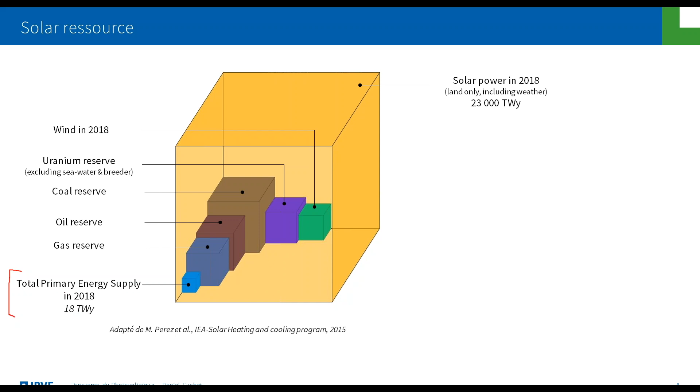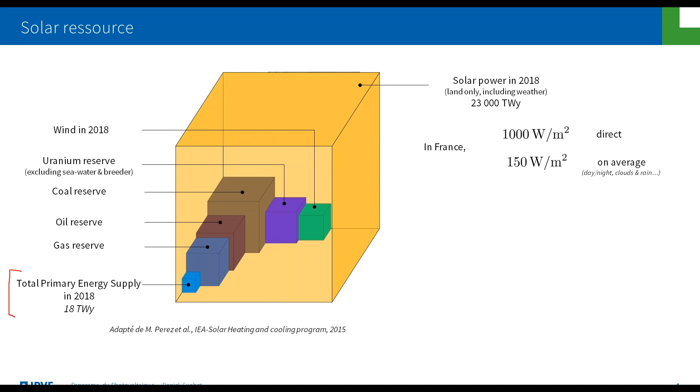If I try to put figures on this, I guess the orders of magnitude to keep in mind is that the solar flux in France is about 1,000 watts per square meter if you are mid-summer on a not too cloudy day as today. So the max power is about 1 kilowatt per square meter. And if you take into account weather, if you take into account days and nights, you have an average yearly power of about 150 watts per square meter.

If you try to understand what these figures mean, it means that if you want to produce the electrical power of France on average over the year, the surface you need is actually 10 to 20% of the surface currently covered with roads. I want to emphasize here that it doesn't mean we should make solar roads. I'm not advocating solar roads here. I'm just talking orders of magnitude in terms of surfaces. And I'm considering how much surface we need to have the yearly production without considering power stability or anything, just energy balance, because I still think it's a relevant order of magnitude to have in mind.

To me, what it really means is that solar raises issues in terms of it's a diffuse source, it's an intermittent source, absolutely, but it represents an energetic manna. It is, strictly speaking, energy falling from the sky. And in the context where we try and think of our energy supplies, I don't see how we could not consider it as a potential energy resource and try to figure out how to handle its drawbacks.

So you have, let's say on average, 150 watts coming from the sky. What can you do with this power? Well, essentially you can do 3 things. You can convert it into chemical bonds, and this will give you biomass, for instance, with a photosynthesis process, which has about 1% of power conversion efficiency. You can perform a transformation from solar energy into heat. This is called solar thermal, and it has an efficiency of about 80%. Or you can try and convert this power directly into electricity, and this is what solar photovoltaics aims at. And in the next coming slides, I will be discussing how efficiently we can perform this transformation.

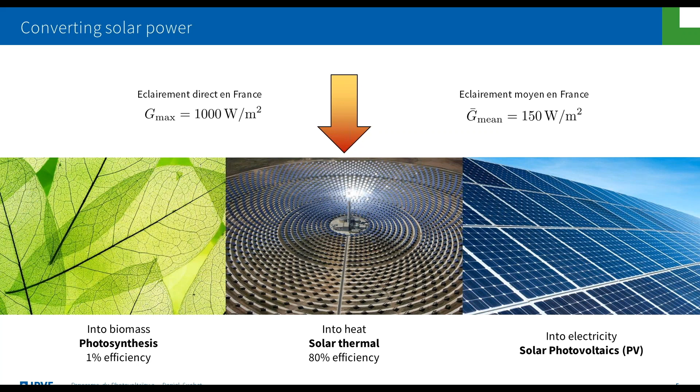Now, of course, the electrons, if you just leave them alone, won't stay in the conduction band forever. At some point, they will relax towards the valence band. So you need the material to absorb light, but you also need the material to make sure that these electrons have a long lifetime.

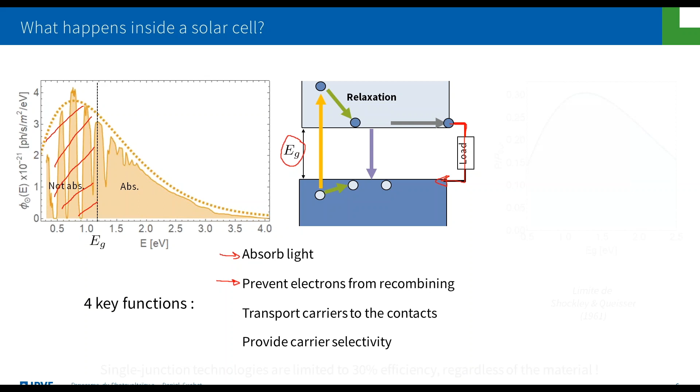So you understand here that essentially, if you have a low gap, it won't work. If you have a high gap, it won't work. You need to aim for something in the middle where the value of the gap is well adapted for the solar spectrum. And this is what I show you here on the right-hand picture. I think you see it now.

This is the maximum power conversion efficiency which you can get as a function of the gap. And you see that the max power conversion efficiency you can get is about 30%. This is called the Shockley-Queisser limit. And it works for a gap which is about 1.1 electron volts.

This, as you see, comes from the fact that we use one single gap for this conversion scheme. And so it doesn't really depend on the material you're using. The material will tell you if the gap is good or not. But this 30% efficiency is the best efficiency you can get for a single junction scheme.

This is also why we're using silicon for solar cells, because silicon has a gap which is close here to the optimal gap for power conversion of solar power. So I think this image here is interesting because it tells you that this 30% max efficiency is a basic limitation for single junction solar cells, and it also tells you which kind of materials we will be looking at when we want to make a solar cell.

We need a material with a gap around the electron volt of band gap, and we need this material to satisfy these key functions, which I have discussed when talking about the conversion scheme. So to me, this very simple picture gives you a hand-waving understanding of the material constraints when you want to do solar power conversion.

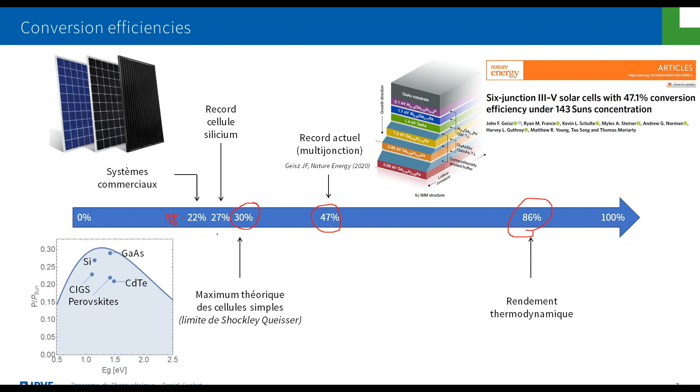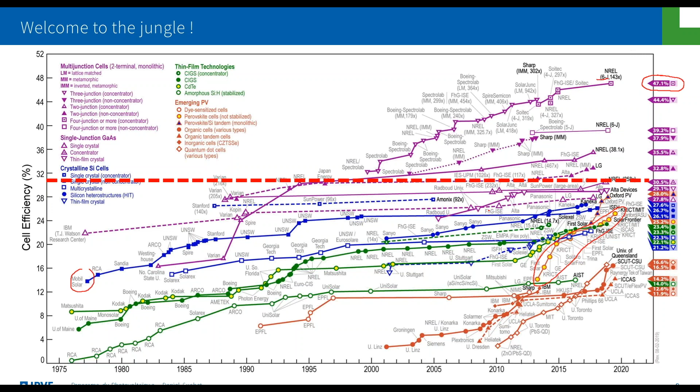So when you talk about solar technologies, what can be a little bit puzzling is you can be talking about any of these lines, and you see that there is a huge jungle of lines. So for this presentation, I will actually focus on one of these lines, which is silicon solar cells. And the reason why I will be talking essentially or exclusively about silicon solar cells is that silicon today represents a little bit more than 97% of the actual market. The remaining few percent are all the other cells which you have seen. So when you talk about solar cells, if you don't make a more accurate statement, you're really talking about silicon solar cells. So in the rest of this presentation, I will be giving you notions about silicon, because I think as of today, it is the most representative data which you can have when you talk about solar energy.

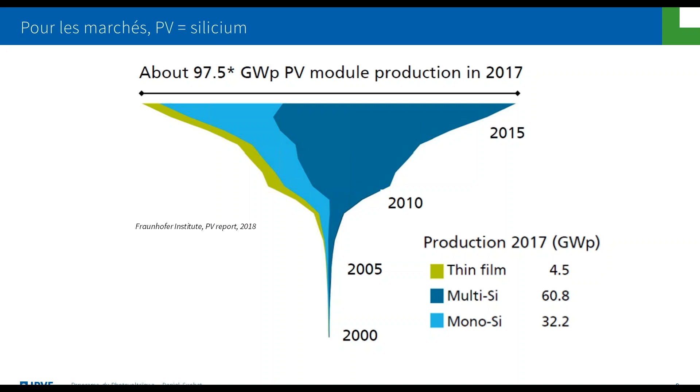When we talk about silicon, we actually talk about a range of scales, which goes from, let's say, raw silicon, silicon chunks, which look like this, all the way to silicon modules, that is to say what we call panneaux solaires, solar panels. And in the next coming slides, I will be telling you a little bit more about these different ingredients of solar cells, how to get from one to the other, what the processes look like, and what are the orders of magnitude about all this. So I'm getting here somehow to my second part, where I will start giving you orders of magnitude and notions on the state of the art of current solar cell technologies.

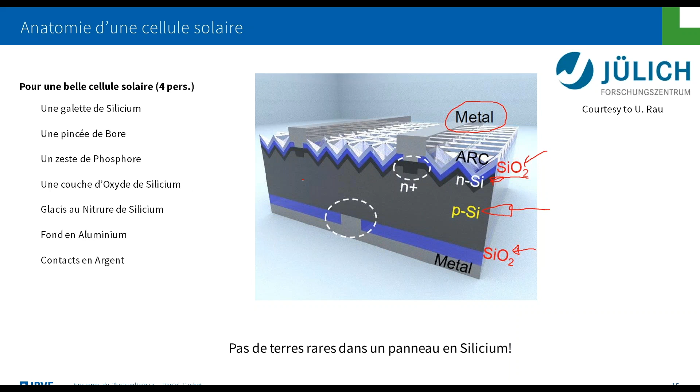Finally, once you have cells, what you are going to do is you're going to take these cells together. You're going to put 60 or 72 of them connected in series and parallel, and you're going to encapsulate these in glass. You're going to frame it and sell it as a solar module, which you can actually sell to customers.

So now I'm really going towards the second part of this talk, and I will give you market notions of PV modules. And what I really like to do in this discussion is two things, is to show you how these things evolve and how they evolve fast. And this is to give you the notion that if you want to think about solar, you really need to update your figures on a regular basis.

And I will try also to give you a reading grid and to draw your attention to some, how to say, subtleties in the different definitions, which I think are required to understand what the figures really mean. Because there are many different figures, they don't all address the same things, and I think it is key to understand the meaning of these figures of merit.

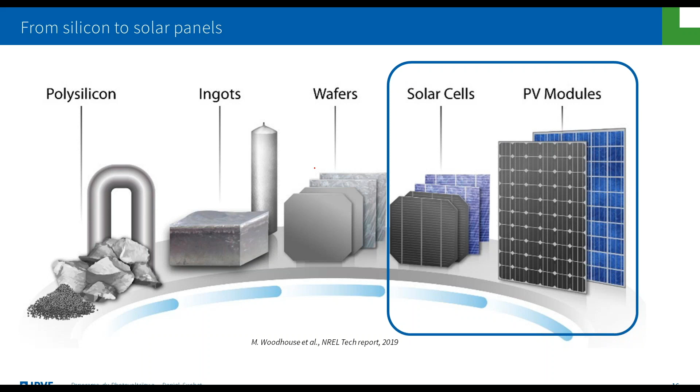I look at how many watts this module is able to produce from this illumination. I calculate how much producing the module costs, and I make the ratio between these two quantities. So it doesn't tell me anything about integration, of course. It doesn't tell me anything about lifetime of the module. It doesn't tell me if the module often works at its nominal power or not.

But the interest of this figure of merit is that as it's just out of the line, it allows me to compare different modules in the same conditions. And so if I want to have a notion of how the industry itself is performing, then this here is the good indicator, because it tells me what happens just outside of the gate of the industry.

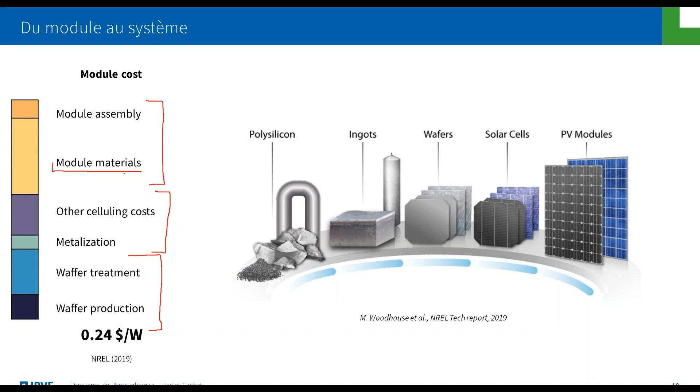So we need to compare this cost to what is called the installed cost. Installed cost is what it's going to cost you to put this solar panel somewhere, either on your rooftop or in a solar farm. So in addition to the module cost, you see that the module here now is just a fraction of this cost. It's about, depending on how you install the module, 10 to 30% of the cost.

On top of this, you need to account for electronics, for hardware, that is to say mounting racks and everything. You need to pay the installation, you need to pay taxes, you need to pay capital, you need to pay land acquisition or renting, and so on. So at the end of the day, the cost of the module is about 10 to 30% of the cost of the solar panel installed somewhere.

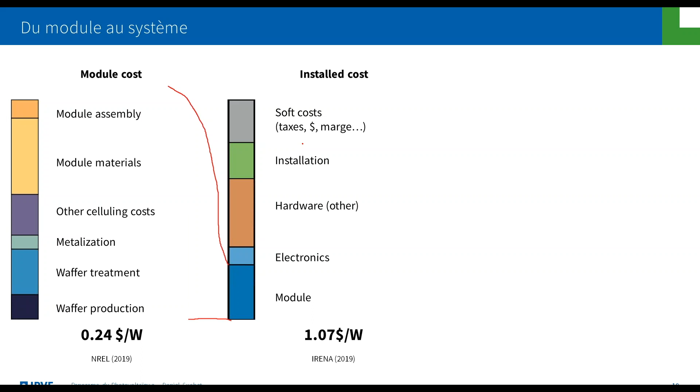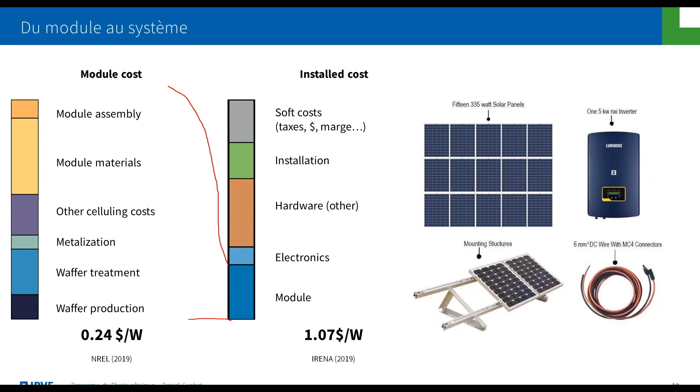So yeah, this is the additional hardware which you need to take into account. So racks, inverters, wiring, and the manpower to install all this. Then the next step, of course, is to consider not a cost per watt, but a cost per energy. And this would be the levelized cost of electricity, the LCOE, which accounts not only for the installed cost, but also how well the device is going to perform.

It's not performing always at its nominal power, in particular at night when it's not performing at all. You need to pay maintenance. You need to account for degradation. And so here is another order of magnitude, which I think is good to have in mind. Today, a silicon solar panel has a typical efficiency decrease of about 0.5 to 1% of its nominal power per year. What it tells you is that in 30 years, if you buy a 20% panel, it will go from 20% to about 17 or 16% of power conversion efficiency.

So even after 30 years, it's still performing actually better than panels you could buy 10 years ago. So the typical lifetime of panels is about 25 to 30 years at least. And I want also to emphasize that this levelized cost of electricity, that is to say really the cost of producing electricity, is about 1/3 of the actual electricity bills which you pay at the end of the day, which have to include also grid integration and taxes.

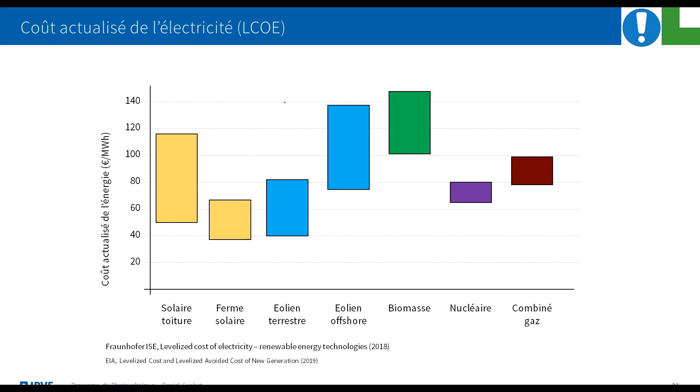Today, it is estimated that a solar module used in Europe will produce as much power as it required in the first place to extract, melt, and process cells. It will pay back this energy in about 1 year of usage. So the module will be used for 25 to 30 years, and within a year, it will pay back the energy it cost to produce the module. And I really want to emphasize here, I'm only talking about the module.

I'm not including here what it costs to add power electronics on top of this, what it costs to add storage if you need storage, what it costs to perform grid integration, because all these things will come on top of this year which I'm mentioning, but it will really depend on how you actually perform things. So I don't claim that this 1 year timescale is the definitive answer to all the questions that we are asking. I say it's the most basic unit on which we can all agree, and then we can discuss what additional things need to be added on top of this.

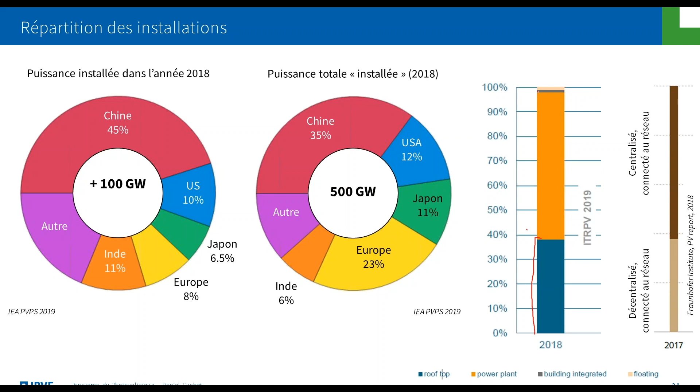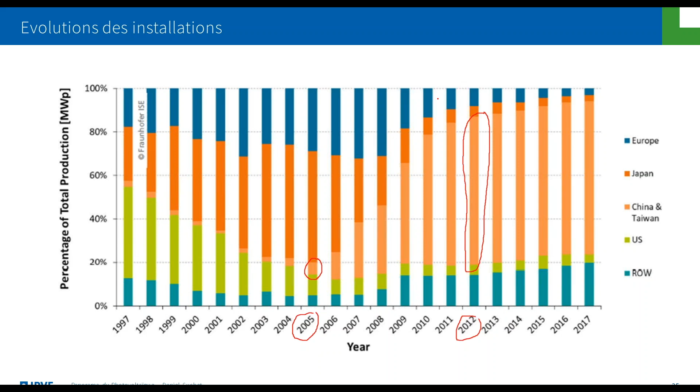One of the key drivers was that they could produce solar modules at a much cheaper cost than anywhere else. But I have also discussed here how the cost of modules at the end of the day will be just a small fraction of the cost of electricity.

To conclude this presentation in the last 5 minutes which I have, I would like to just flash 4 of the challenges which I think need to be tackled now. I think these challenges are not limiting yet, but if they're not addressed, they will become bottlenecks for future development of solar power. I had it in the slides, but I didn't have time to comment it.

Today solar power is about 3% of the world electricity. So today it is significant, but it's clearly not the main actor of electricity in the world. If we think that these 3% will increase, then we need to prepare now for issues which will arise when we reach 5, 10, 15% of electricity production, if we manage to reach these levels.

The first challenges I want to raise are related to the industry itself. Today, we're able to produce about 100 gigawatts of additional capacity per year. How can we scale this up? And how can we scale this up in a meaningful way, from economical, ecological, and social perspectives? I just bring here the question of this scaling up. It can come from different processes.

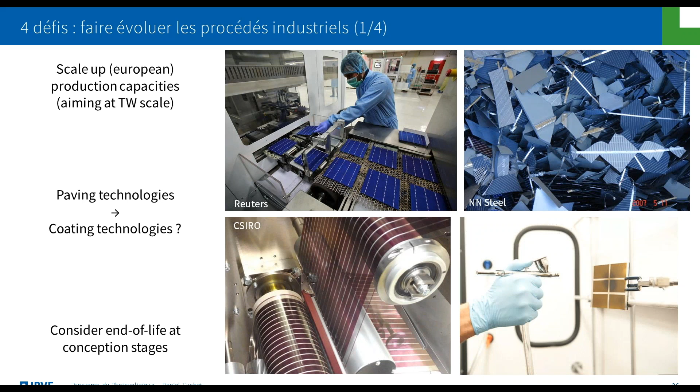We can recycle easily the outer layer, the window, which is being used to encapsulate. We can recycle easily the frame, and window and frame is the largest amount of mass in a solar panel. But today, the options for recycling the solar cell, which is the technology part, into a new solar cell are quite limited. Can we think of ways of conceiving, of designing these cells to help recycling 25 years after the cell is actually being produced?

The second challenge which I want to raise is a little bit less energy related, but it is market related. And it's to think of developing innovative applications for solar panels. I really, really don't claim that these applications will change the face of the energy sector in general, but they have two interesting options to my mind.

The first one is it can help the field moving forward in terms of innovation and of driving forces, and it can help solar energy getting closer to citizens and customers. And we know that having people involved with energy issues raises the awareness towards energy in general, and we need this awareness to be risen.

The third challenge which I will mention is the one which I am focusing my research on more specifically, and it's aiming towards very, very high efficiencies. We have seen how single junctions are limited to 30%. We have seen that we know how to overcome this limit, for instance, playing with the architecture of the cell, stacking two cells together, one which will be good for high energy photons, one which will handle low energy photons, and how doing this we can overcome this 30% limit. There are other things which can be done, playing with light, playing with carriers themselves.

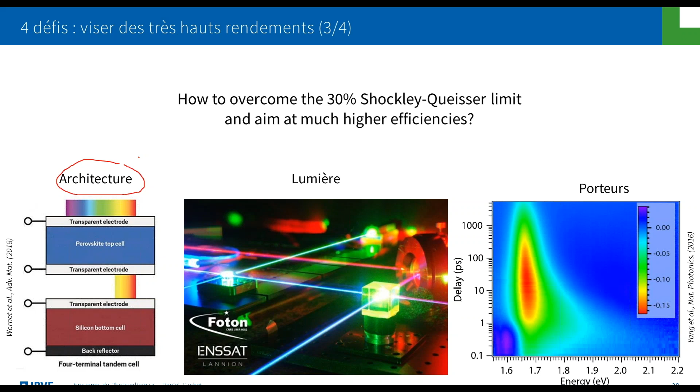And to me, these questions, there again, have at least two interests. First, I am convinced that increasing efficiencies is key to reduce costs at the end of the day. And second, this is basic research. When you perform basic research, you know what you're looking for. You don't know exactly what you're going to find. And asking these questions requires to go back to basic notions of energy conversion in semiconductors. And this can bring results not only to high efficiency issues, but more generally to the solar sector, and more generally actually to solid state physics.

And finally, of course, we cannot avoid mentioning grid integration. Essentially today, grid integration is not the limiting factor for solar energy, because solar energy is still limited at 3% in most electricity mixes. But if we want grid integration not to become a bottleneck, we need to investigate now what can be done about this. And there are things to be done regarding production, and especially thinking about using several energy vectors at the same time. How can we, on production sites, transform solar energy into chemical, or solar energy into thermal, to maybe help integration?

There are things to be thought about the grid itself. How can grid be adapted to help integrating larger shares of intermittent sources? And there are things to be thought about consumption. What can we change in our own relation to electricity? If we change drastically the way electricity is being produced, then of course the use of electricity which we're going to have cannot remain exactly the same. And so there are things to be adapted on our usages as well, if we believe that intermittent renewable energies are to play a key role in the energy sector worldwide.

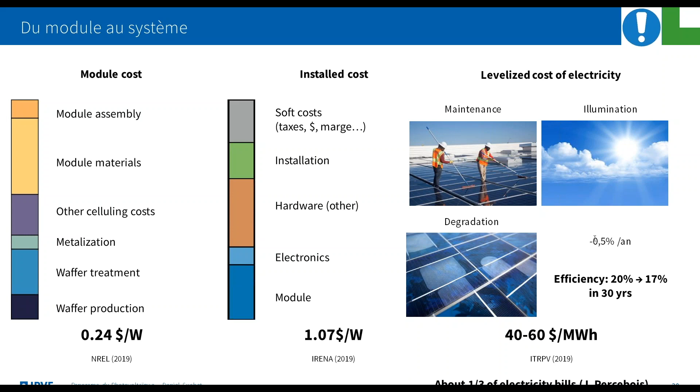My question was, what are the main risks and damage on the environment during production or recycling? Is it the silicon chemistry, or is there other pollution on the environment? It's a very good question. First, thank you very much for the feedback. So I am not an expert in the industry process directly. I'm actually working on it right now, but I don't have definitive answers on this. So what I will give you here is my understanding, but it would be worth checking it against

other sources. And I would recommend reading this report here, where they go more into the details of the different chemicals and physical treatments of the processes. To my understanding, clearly the most energy consuming bit is producing the wafer, because you need to melt the silicon to purify it, and to purify it to very high purity. And this here is the most demanding part.

Now, is it also the most impacting in terms of chemicals? I don't know. And I'd rather not say something completely wrong here. So two answers. First, energy-wise, it is really this step here which is most demanding. And for more details regarding chemistry pollution, I guess the good reference is this report here. The link will be provided in the slides. Okay, thank you.

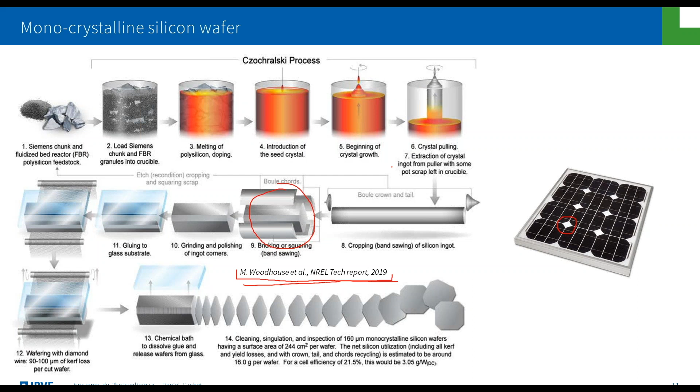And to me, it will come with improving our production management. This can include storage, this can include flexibility, this can include many things. It will come with adapting our consumptions. We cannot change a fully dispatchable source with an intermittent source and pretend that we're going to have the same service being brought without huge adaptation costs. This is, I think, clear.

And I don't know right now what it will take and what can we really expect at the end of the day. But my conviction is that solar will play a key role in the energy landscape in the future, and we need to prepare this and to make sure that the claims which we make are honest and meaningful. And I hope it kind of answers the question.

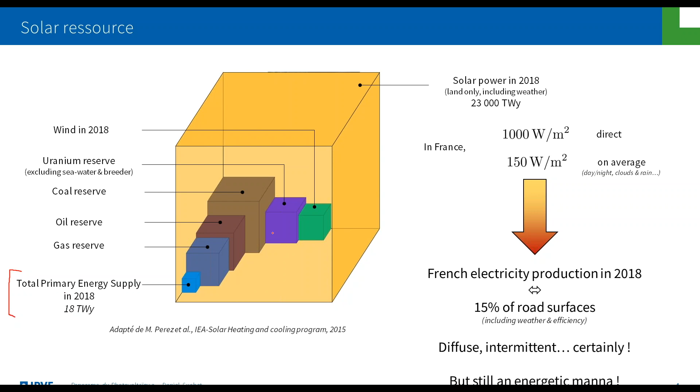So if I get a bit more personal, my personal concern is that we are trying to work for the energy transition, and we see that there are many challenges if we try to make the transition from fossil energy to renewable energy. And my fear is that instead of making energy transition, we're going to make energy accumulation. So what do you think about that?

There again, I totally understand this concern, and this is where I really believe that solar or wind or actually any other form of energy are ultimately tools, and that it really depends on what we decide to do with these tools. But on the other hand, you can't pretend that a tool is able to do something it cannot. You can have a very good hammer, it won't help you to saw a log, for instance.

So what I really wanted to do with this presentation was to try and give you what I hope to be an honest perspective on solar and what it really does today and what is coming next. I think from what I hear in public debates, you've got the two ends of the spectrum. You've got people claiming that you just need to put solar panels everywhere and the problem will be solved. I don't believe this is true.

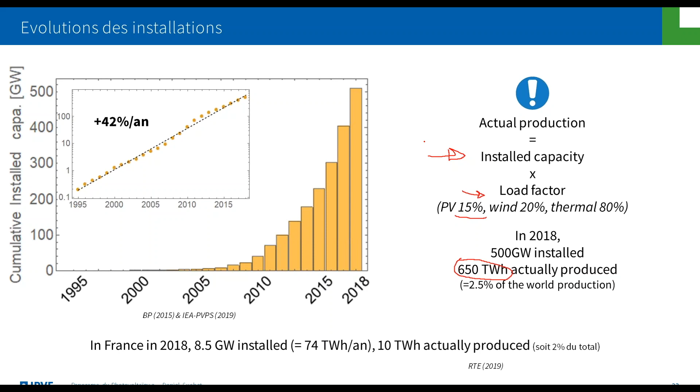So I did not indeed show upcoming trends. I presented you past trends up to today, and I didn't say what I expect the next steps to be. One of the reasons is that predictions are very hard, especially when they deal with the future, don't they?

What I can try and answer, though, or at least share my opinion on, to be more accurate, is this question of can we move the solar industry, and in particular can we have production lines installed in Africa in a way that people would be producing the panels they will be using, and not necessarily depend on technologies which are brought to them in a kind of neo-colonialist way. I believe so. And on the other hand, we see with Europe how difficult it is to make things move forward.

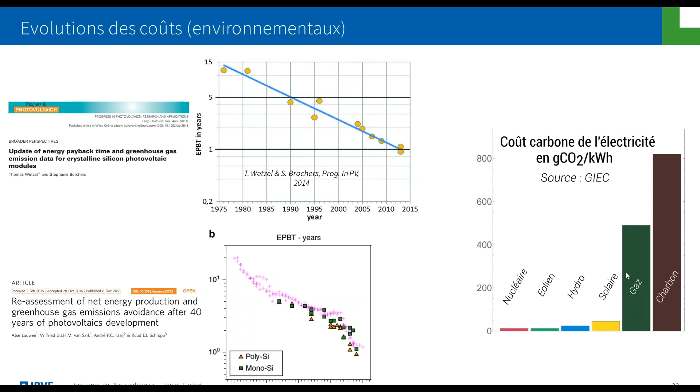I don't have a definitive answer to your question as to why this technology is not much more developed. I think I can make some hypotheses here. I would say several things. First, these technologies are much more demanding in terms of installation than what you can have with solar panels. You can't make such an installation on your own rooftop, for instance. And rooftop does represent about a third of installed PV over the last years.

I don't know exactly what is the actual conversion efficiency which you can get from these installations. I don't know what is the lifetime of these installations, and I don't know what is, at the end of the day, the cost per watt which you get from these installations. So all these things would need to be looked at if you want to have an answer to your question.